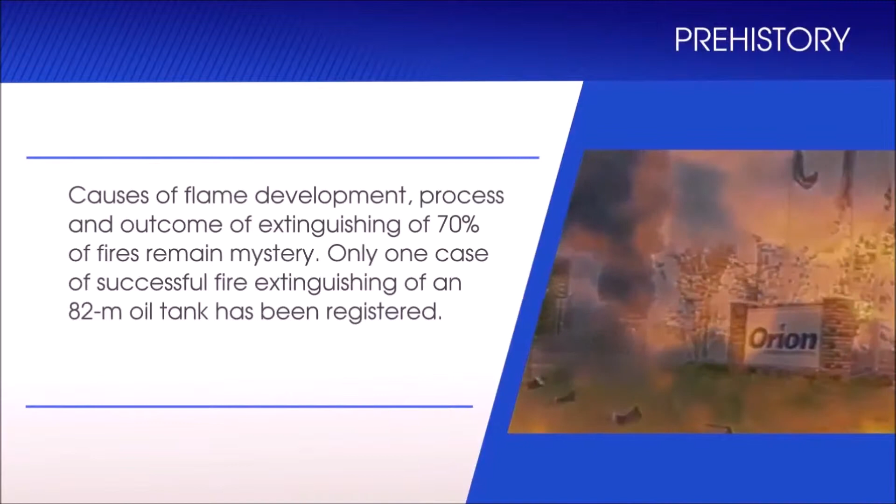The causes of flame development, process and outcome of extinguishing of 70% of fires remain a mystery.

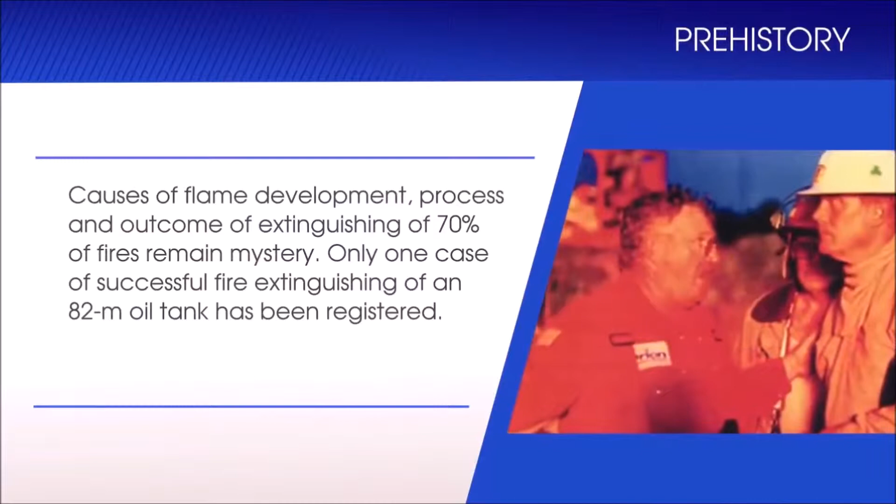Only one case of successful fire extinguishing of an 82-meter oil tank has been registered. The tank was extinguished in the United States of America at the Orion Oil Storage Facility using non-standard, extra-powerful equipment that had been delivered from another region specially for this purpose.

Not a single case of an oil tank fire extinguished successfully with the help of fixed or semi-fixed firefighting equipment has been registered anywhere in the world so far.

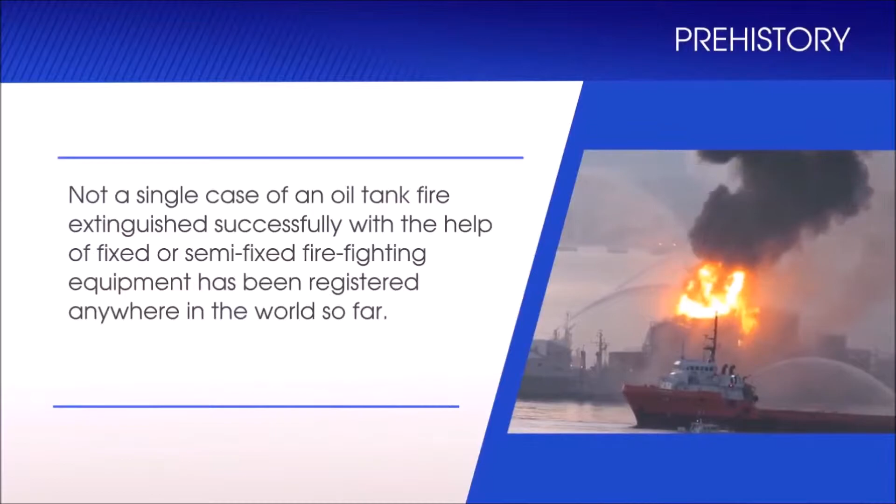These incidents show that in any country in the world, regardless of economic strength, fixed fire extinguishing systems installed on storage tanks in hydrocarbon processing facilities and factories cannot provide the solutions they were built for: first response to a fire and extinguishing it in its initial stages.

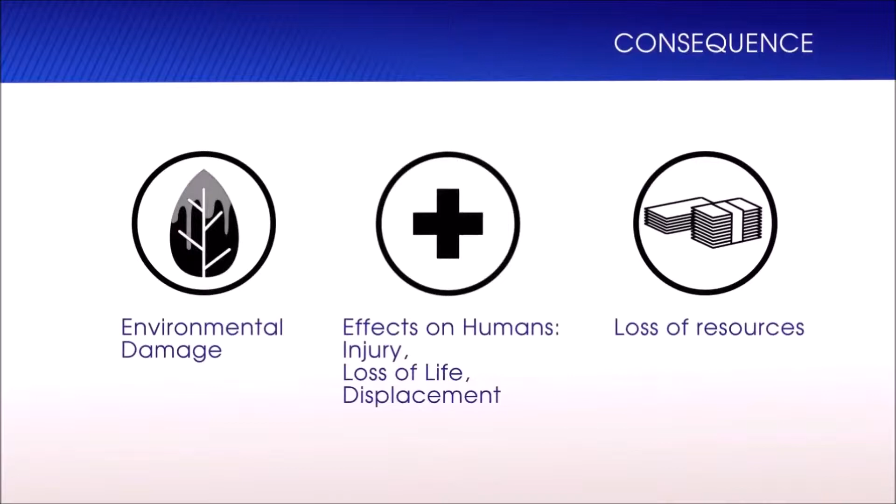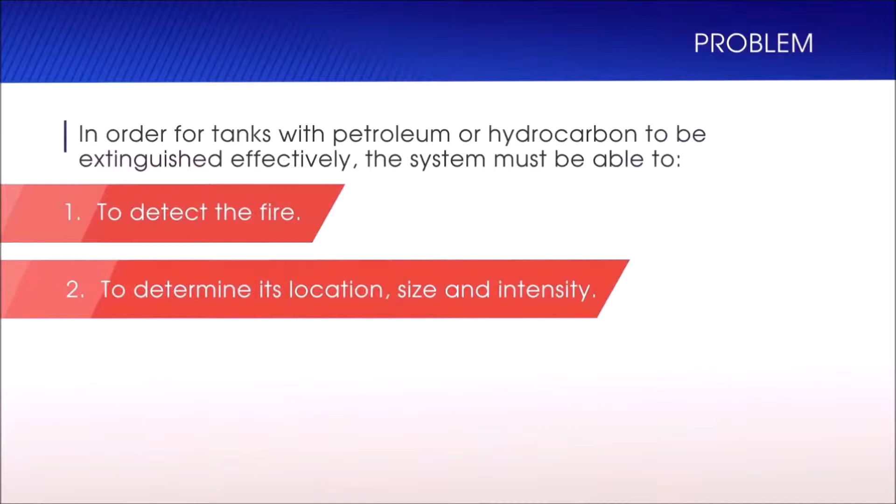In order for tanks with petroleum or hydrocarbons to be extinguished effectively, the system must be able to: 1. Detect the fire. 2. Determine its location, size, and intensity. 3. Turn itself on and deliver the foam directly to the source of the fire.

4. Completely extinguish the fire. 5. Determine and confirm that the burning has stopped. 6. Disconnect extinguishing systems that are not in use.

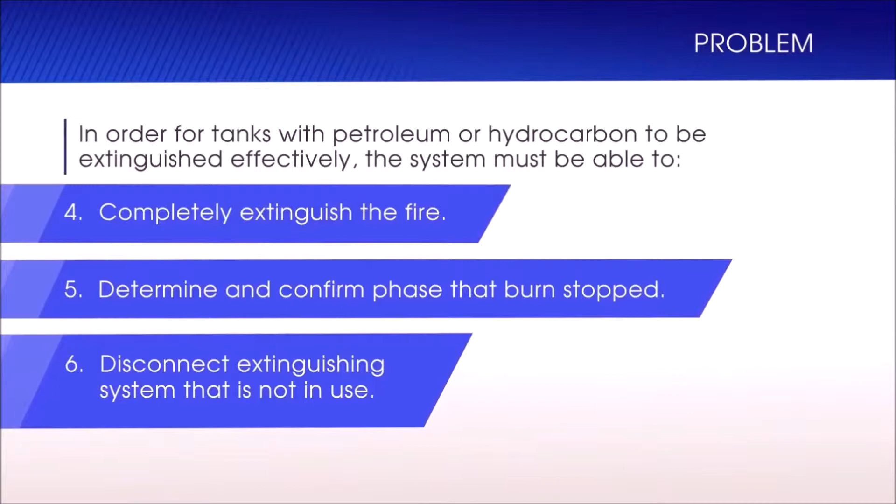These 6 points are guaranteed to successfully extinguish any fire for any tank size with any amount of fuel.

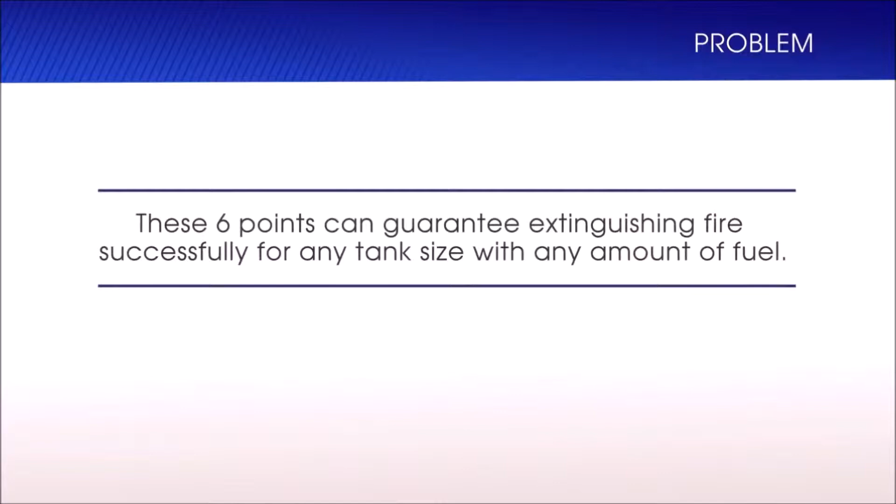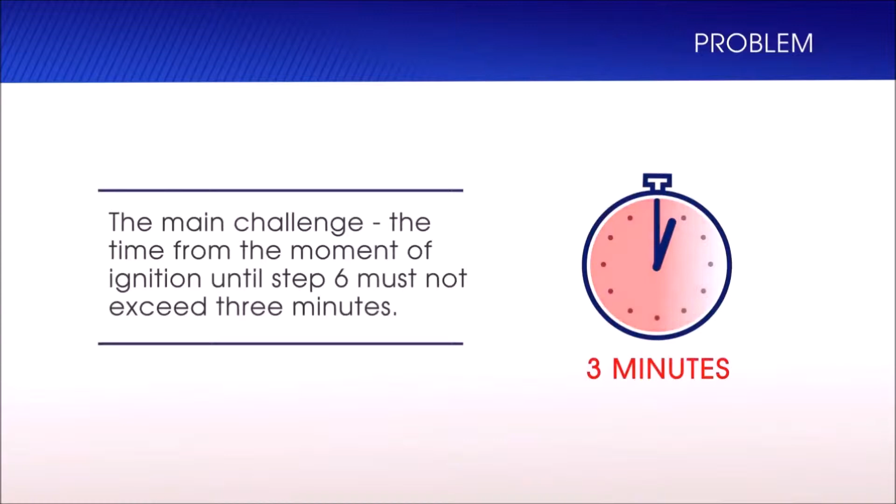The main challenge is the time from the moment of ignition until step 6, which must not exceed 3 minutes. Currently, available systems cannot reach the 4th stage in less than 12 hours.

We present the Impulse Storm IS fixed firefighting system, which can reach all 6 stages and completely extinguish any fire in less than 60 seconds.

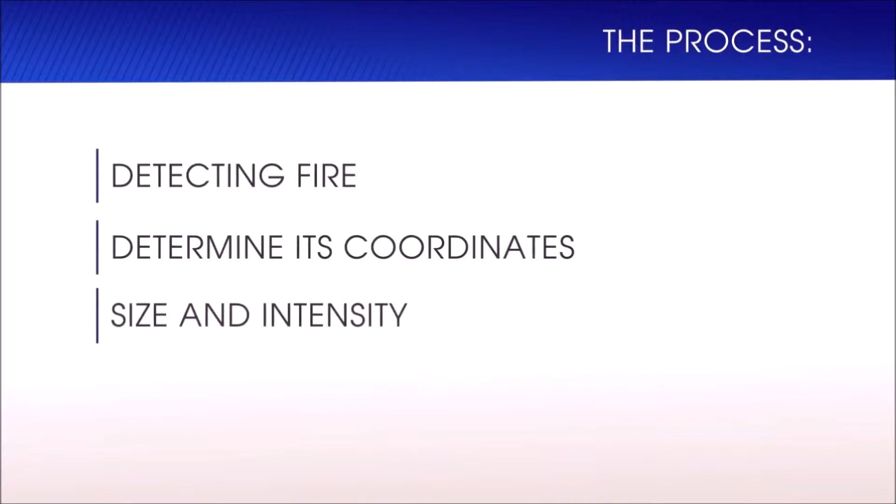The process: detecting the fire, determining its coordinates, size, and intensity. Example: a cluster of oil tanks of varying sizes. Monitoring the facility from a single point is impossible.

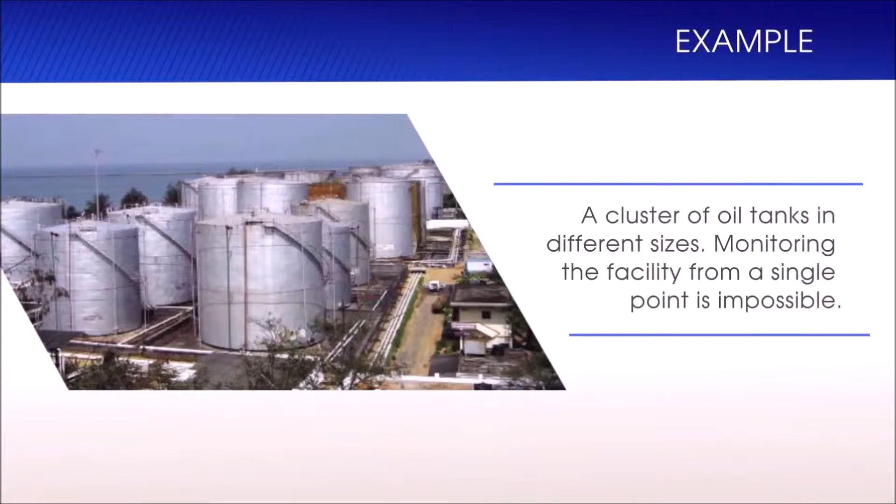Solution 1: Installing an array of infrared cameras across the entire facility. Problems: complicated installation, major setup and maintenance costs.

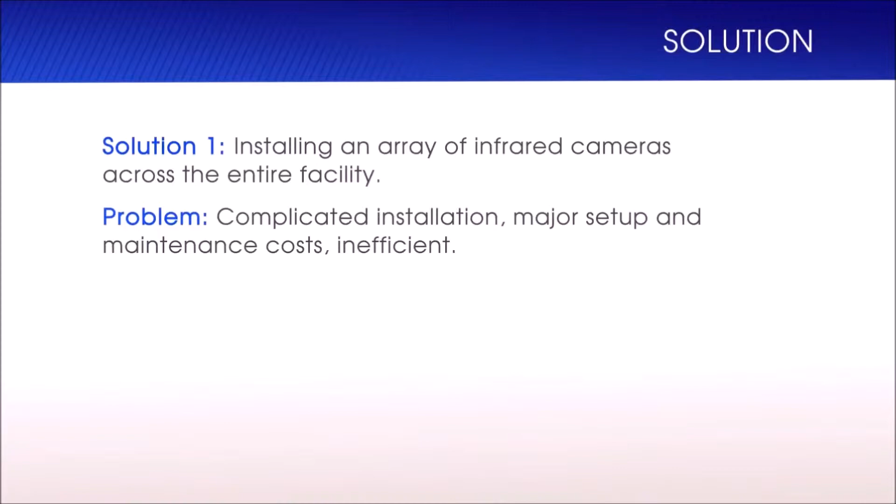Inefficient. Our solution: a new monitoring system combining 1 or 2 infrared cameras, software algorithms, and a set of mirrors, providing an independent scan of each tank and a visual outlook of the entire facility.

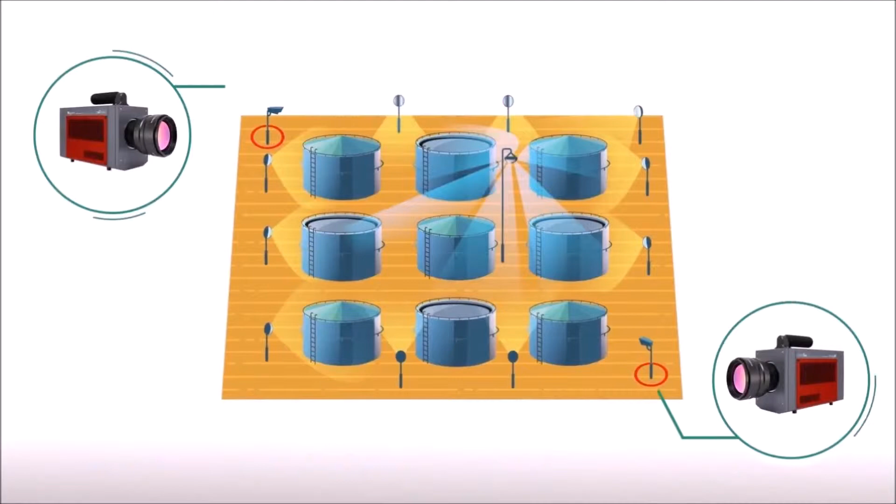Our software analyzes information in real time and can determine the location, size, and intensity of the fire in less than 2 seconds from the moment of ignition.

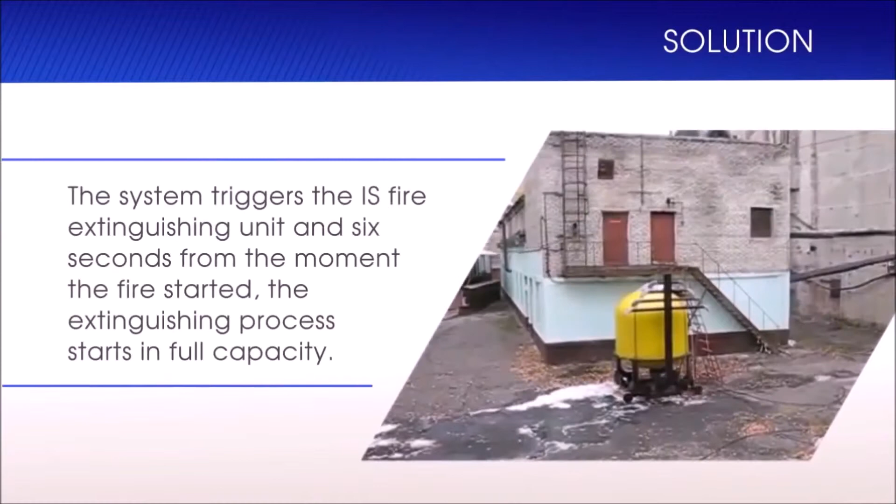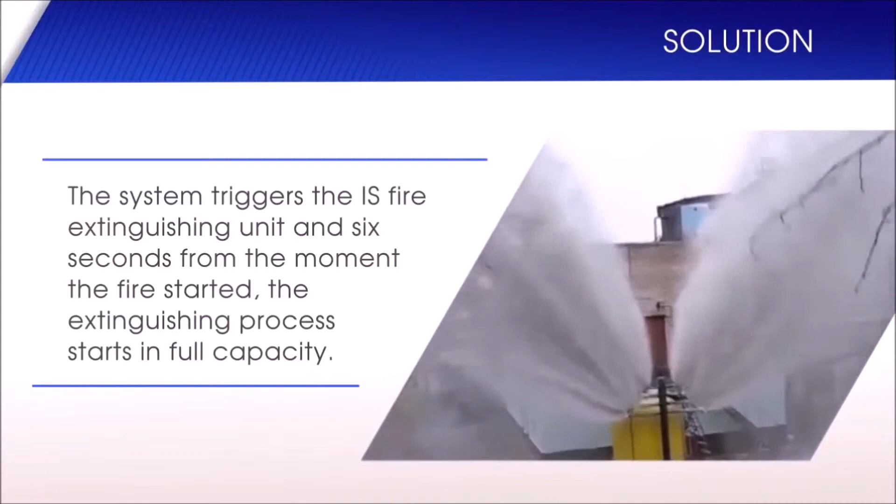The system triggers the IS fire extinguishing unit, and 6 seconds from the moment the fire started, the extinguishing process starts in full capacity. IS creates super compressed foam bubbles using very high pressure and neutral gas.

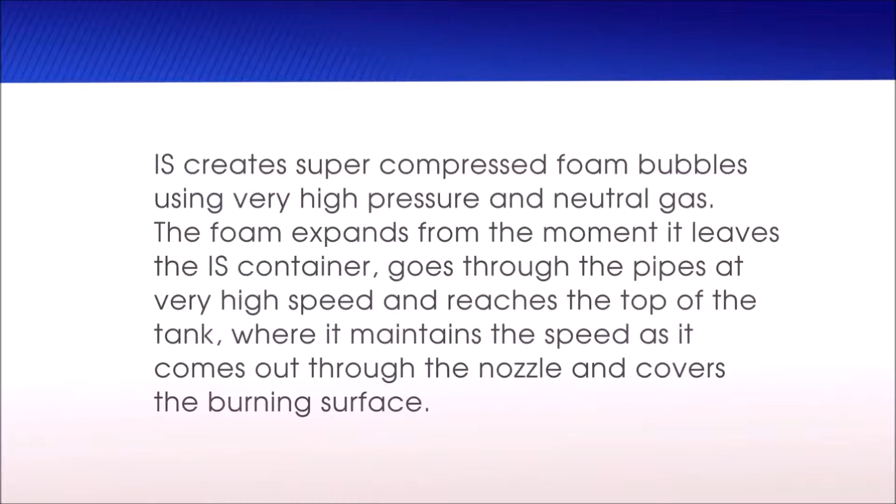The foam expands from the moment it leaves the IS container, goes through pipes at a very high speed, and reaches the top of the tank, where it maintains its speed as it comes out through the nozzle, covering the burning surface.

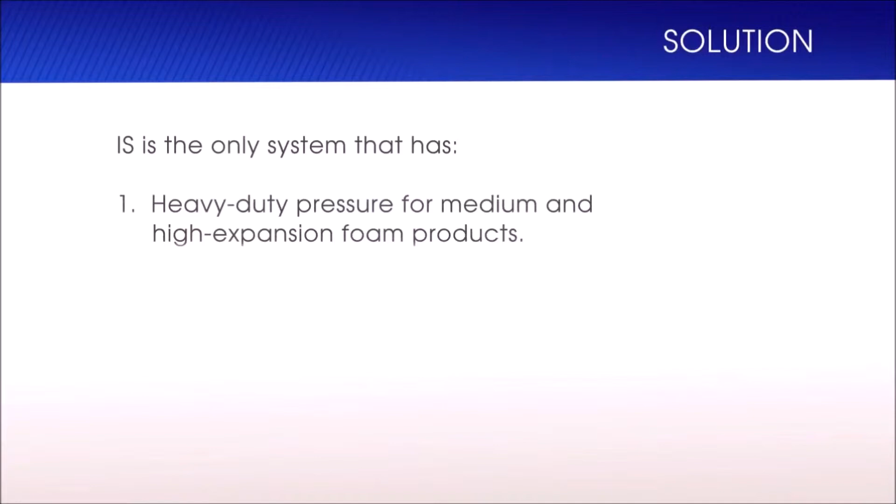IS is the only system that has: 1. Heavy-duty pressure for medium and high expansion foam products. 2. No oxygen in the foam mixture.

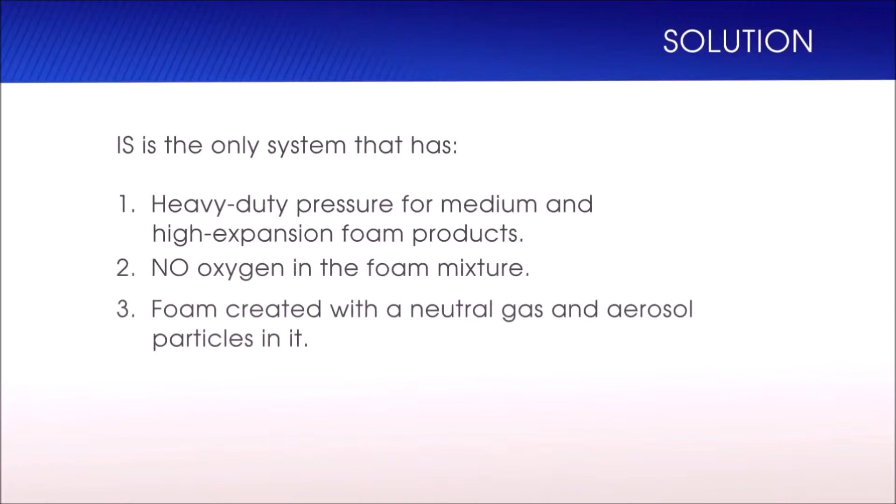3. Foam created with a neutral gas and containing aerosol particles.

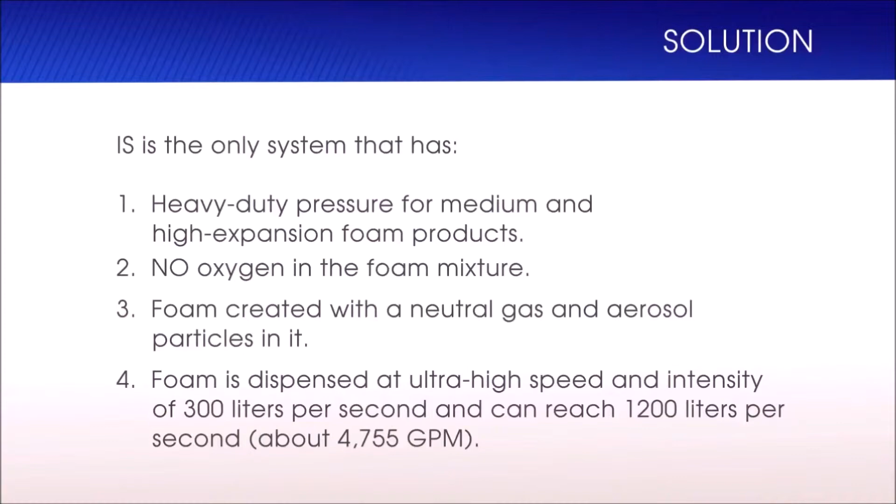4. Foam dispensed at ultra-high speed and intensity of 300 liters per second, and can reach 1,200 liters per second, about 4,755 gallons per minute.

These unique characteristics increase the extinguishing effect by 10 times compared to normal systems. This makes the IS the only system in the world capable of extinguishing a 20,000-ton oil tank fire in 27 seconds.

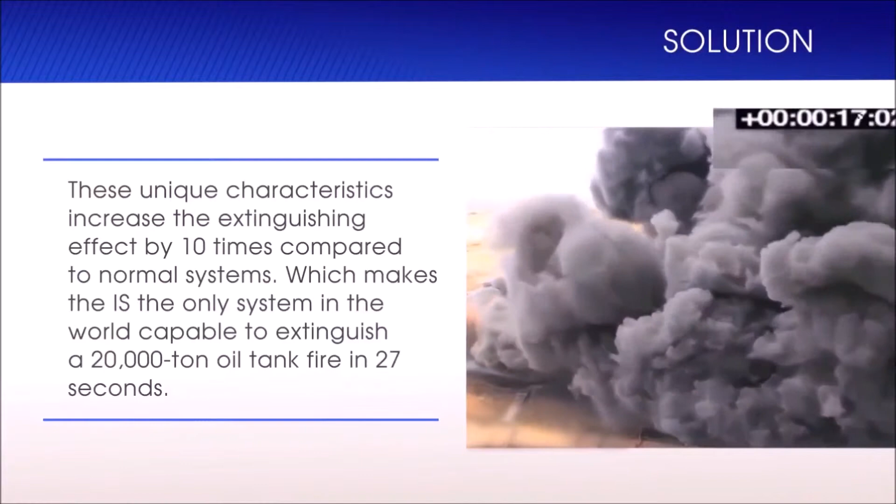Comparing IS with any other system in the market is impossible, because there is no other system that can extinguish a 20,000-ton tank fire by itself.

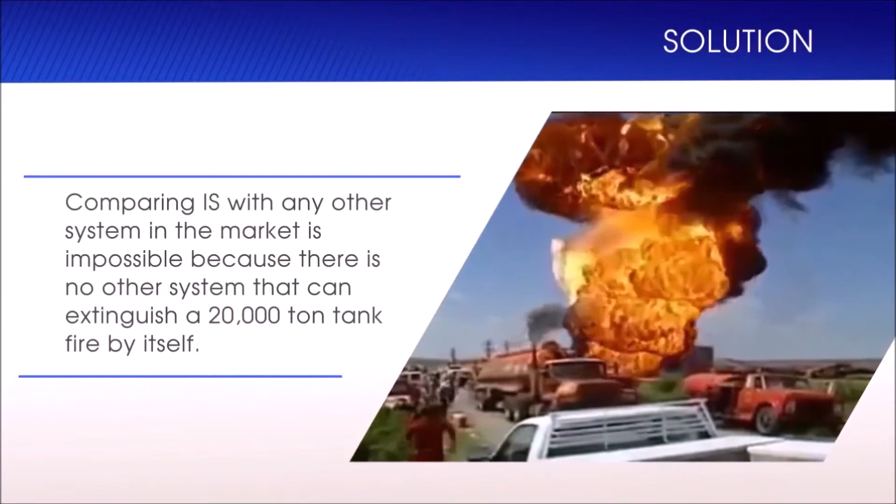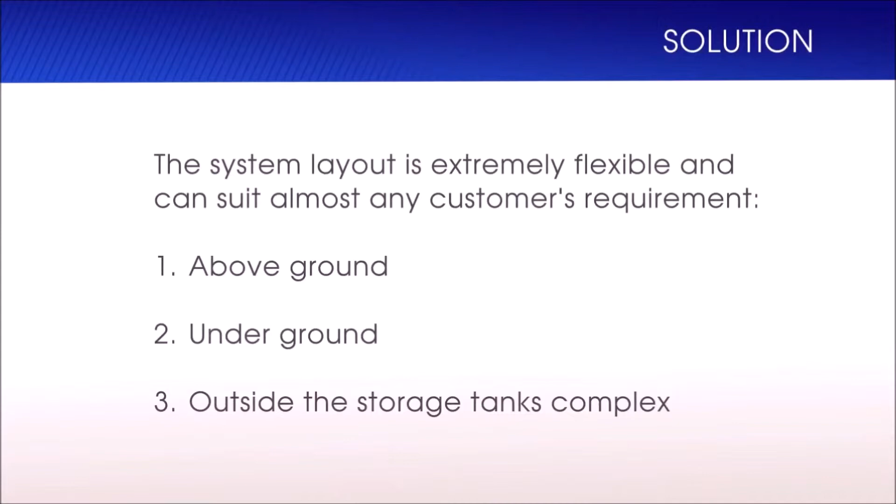The system layout is extremely flexible and can suit almost any customer's requirements: 1. Above ground. 2. Underground. 3. Outside the storage tank complex.

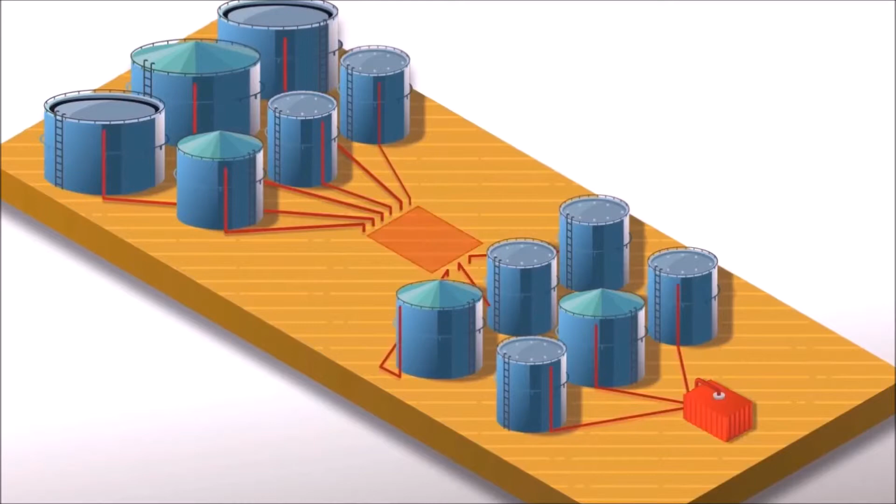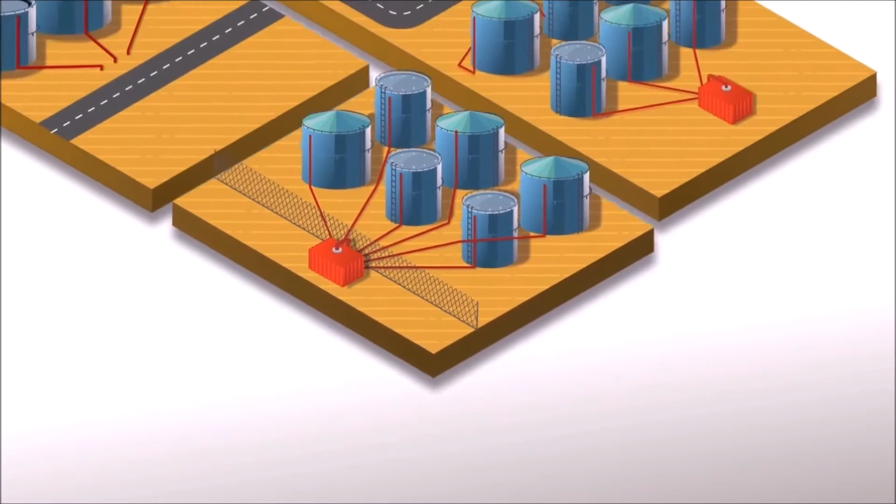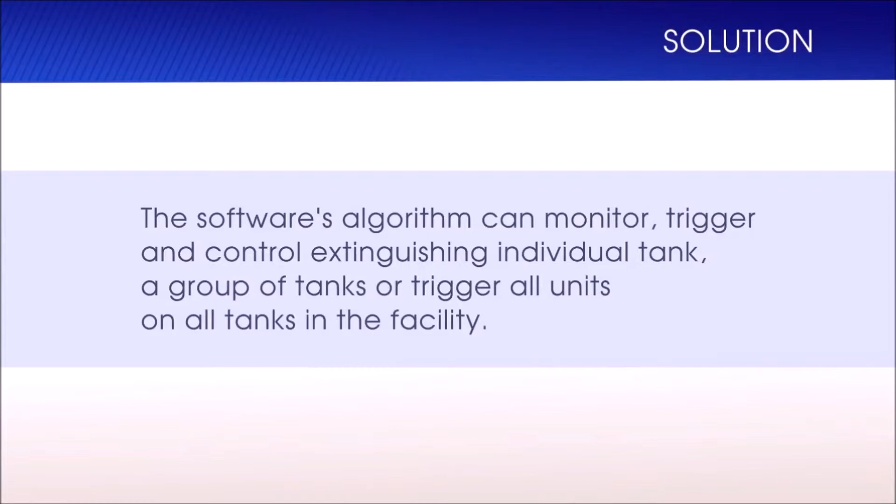The software's algorithm can monitor, trigger, and control the extinguishing of an individual tank, a group of tanks, or trigger all units on all tanks in the facility.

The system will operate at maximum capacity in any layout configuration. A mobile unit which can be deployed and connected to the burning tank's extinguishing pipes is also available on demand.